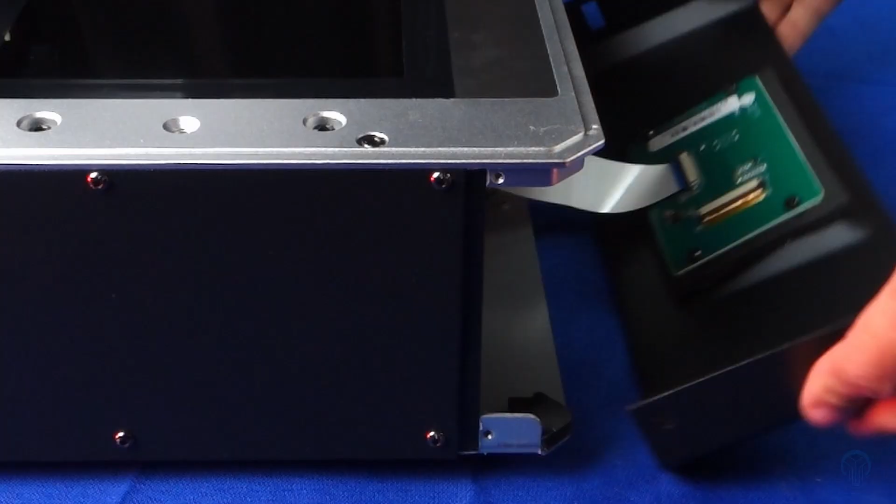Getting replacement parts, however, could prove difficult if Anycubic discontinues any of these in the future, and seeing how they've significantly reduced the price of the machine, it could mean that they're planning to do so within the next year.

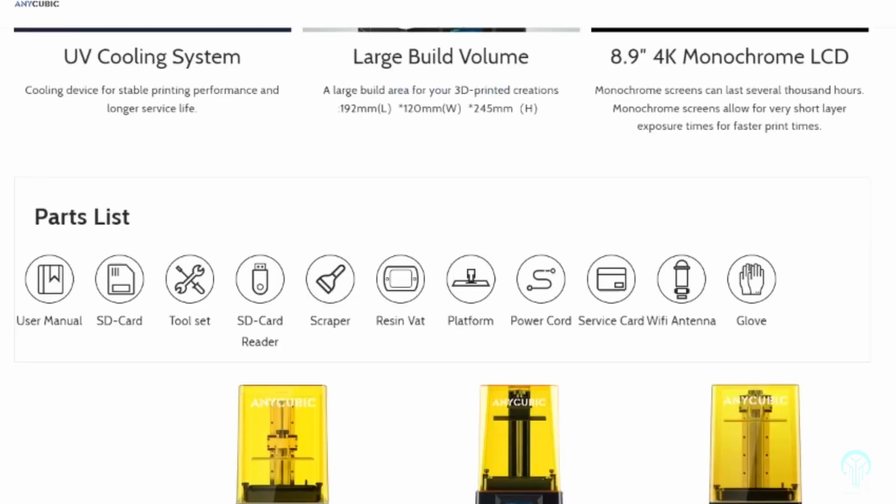If I'm being honest though, I've rarely needed to replace my screen, since 9 out of 10 times I've just had to reseat the screen instead. So for most people, this shouldn't be an issue. Also, in most cases, the price of the replacement screen will often make it more cost effective to simply purchase a more up-to-date machine.

When unboxing this machine, I always recommend checking for any particles or debris which may be on the FEP sheet or the LCD screen itself. Before any prints can be done, we first need to level the print bed, and for this we're going to use the sheet of paper that came with the machine.

You're going to loosen the bolts on the top of the bed and place the paper underneath. You'll then go to Tools, Move Z, and Home to home the print bed. You'll then apply even pressure on the build plate and retighten the screws. Your print bed is properly leveled when you can generally tug the paper out with even pressure on both sides.

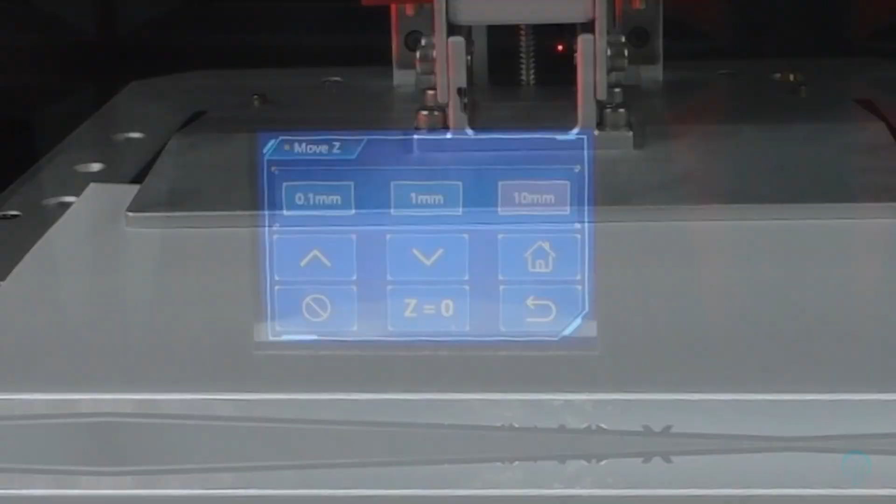As a side note, if your print isn't sticking, 90% of the time it's that the build plate isn't leveled correctly. You can find issues in the first couple of layers at two key points by listening to the suction sound that's made when the plate makes contact or lifts away.

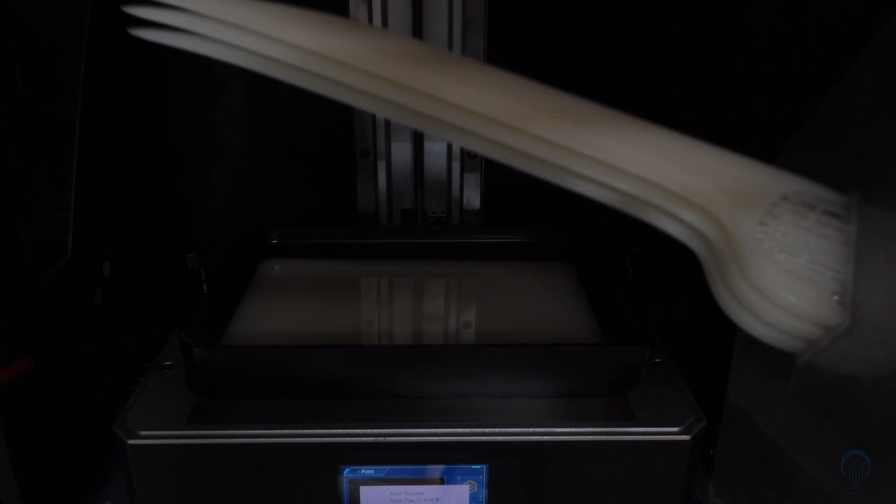I did open this machine to check to make sure that it had proper wire connections instead of tinned ones. In all the machines I've tested so far, only this one and its corresponding washing station had proper terminal connections. This is a great sign, and I hope to see this from other companies in the future.

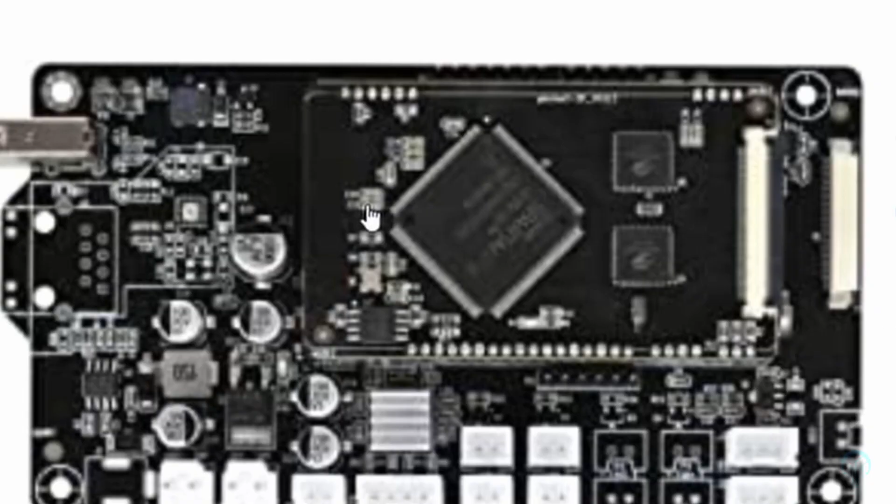One big issue that I have with this machine is the lack of a wiring diagram. Although the company does sell replacement motherboards, I simply couldn't locate any information on what each of the connections did for this machine. In today's age, this is potentially a big problem since it makes doing repairs or troubleshooting more difficult with the machine. I did create a reference page for the different boards, and that will be available on my website as a PDF guide.

Although this machine does come with Wi-Fi capabilities, I personally don't find these to be very secure, so I generally opt out of using them. In this case, if you want to have this capability, you can install the antenna that comes with the machine and sync it up with your other devices. From a production setting, this is generally the preferred workflow. However, I do still recommend having proper security protocols in place when doing so.

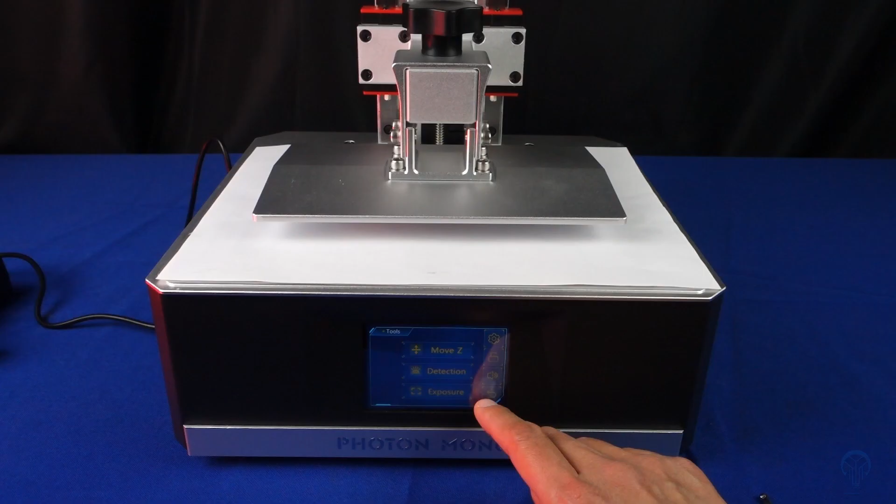The UV light that's used in this machine has some interesting properties to it. Unlike most machines, this one is designed with a built-in option so that the user can change its brightness level. When playing around with this setting, I discovered that I could tweak this depending on the level of detail I wanted. On my machine, I needed it to be set to 50% because it caused light to bleed into the surrounding pixels, which washed out some of the detail work.

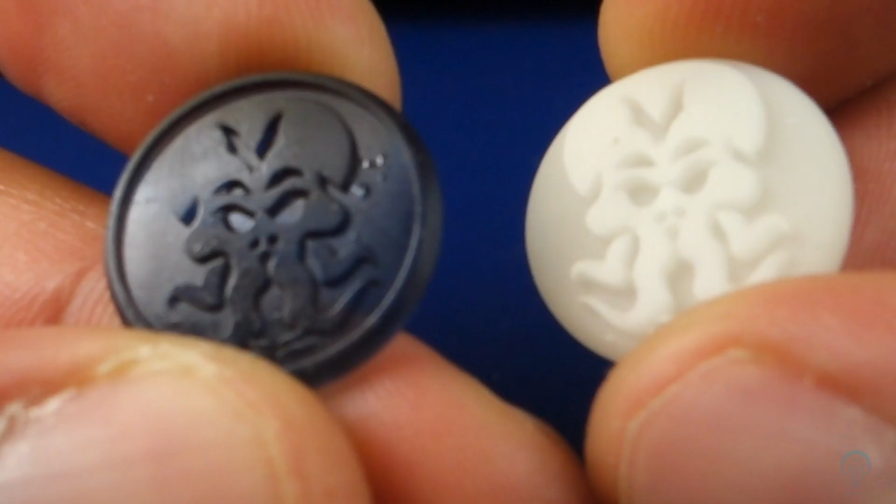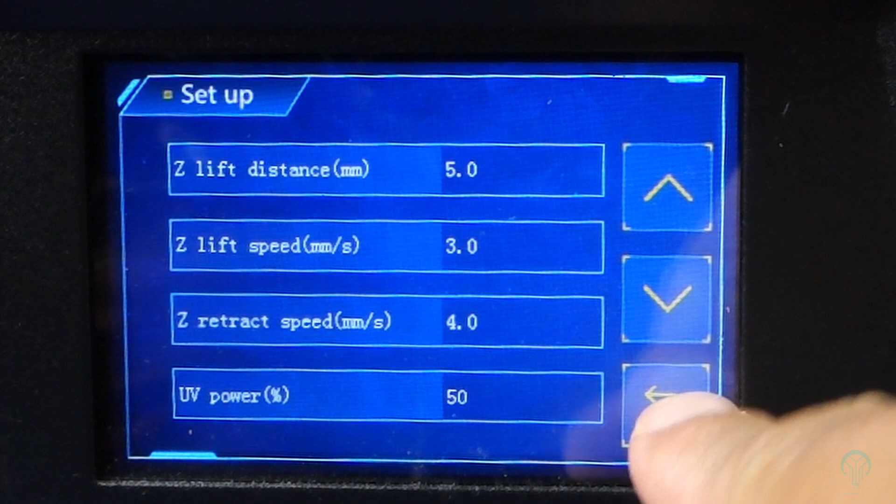Here's a quick comparison with my Elegoo Saturn so that you can see the difference. Although this can be a problem on smaller prints, it's great when doing larger scale production work where speed is a factor. Also important to note is that increasing the UV brightness could cause the light and the LCD to fail faster if it's set too high. So I would avoid doing this if you need accuracy or if you're trying to extend the life of your machine.

Now, I'm not quite sure how this got past quality control. However, the plastic that's being used for the knobs that tighten both the vat and the build plate are sensitive to isopropyl alcohol. Essentially, they become a liquid mess of melted tar-like substance when they come in contact with that product. Considering that isopropyl alcohol is normally used in the cleaning process, this can be a serious issue. Because the material I print with is predominantly white in color, it often leaves a black residue on the prints unless I scrub them down.

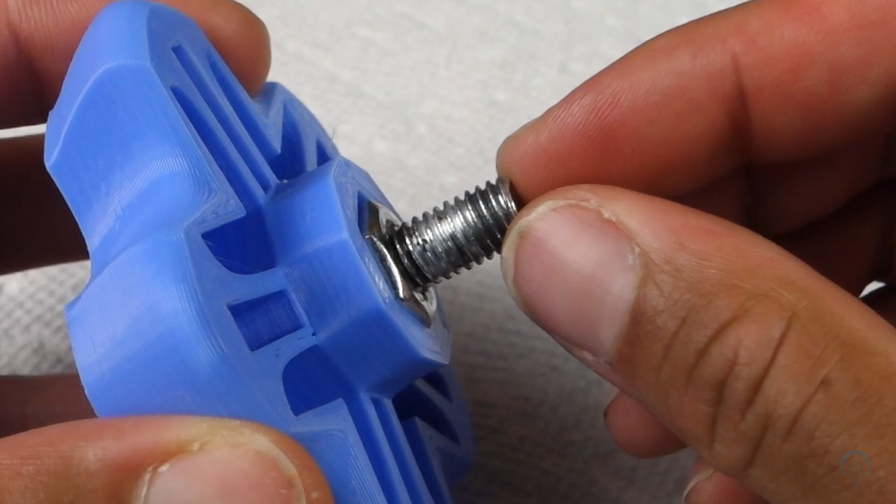Now, there's two methods for dealing with this issue. Prior to using your machine, you can spray a sealant over the plastic after having masked the threads out. Since mine had already been compromised, I designed some replacements and hacked off the original plastic. As always, I'll have the STLs available on my website along with the guide for this mod.

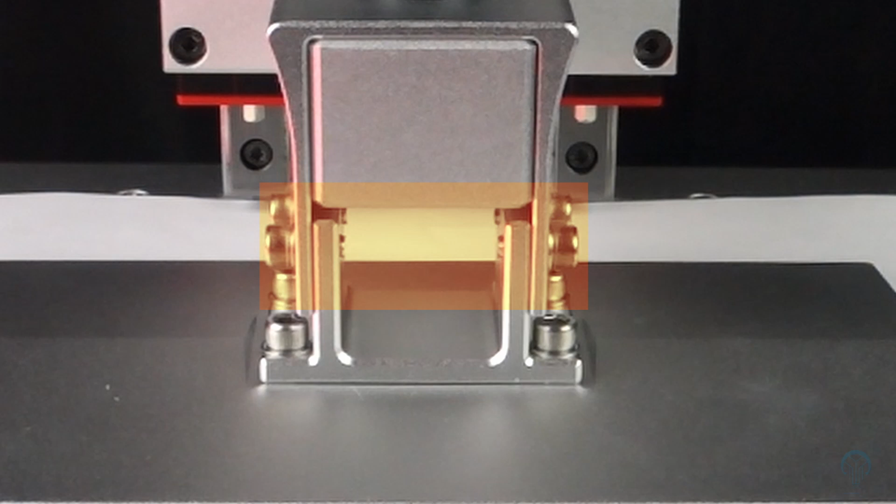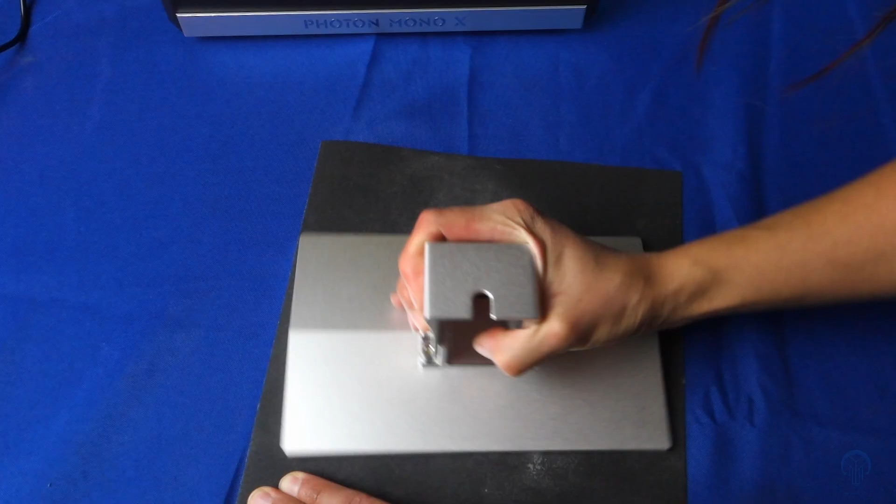The build plate is attached using 4 screws and is what I found to be more stable when dealing with these types of machines. The build plate on mine was flat, however, it isn't always the case, and it should be something that you check. If it isn't, you can sand it down with some 250 grit sandpaper, making sure to keep the build plate flat when you do so. To make things easier, you can tape down your sandpaper sheet with a strong adhesive to keep it from moving around.

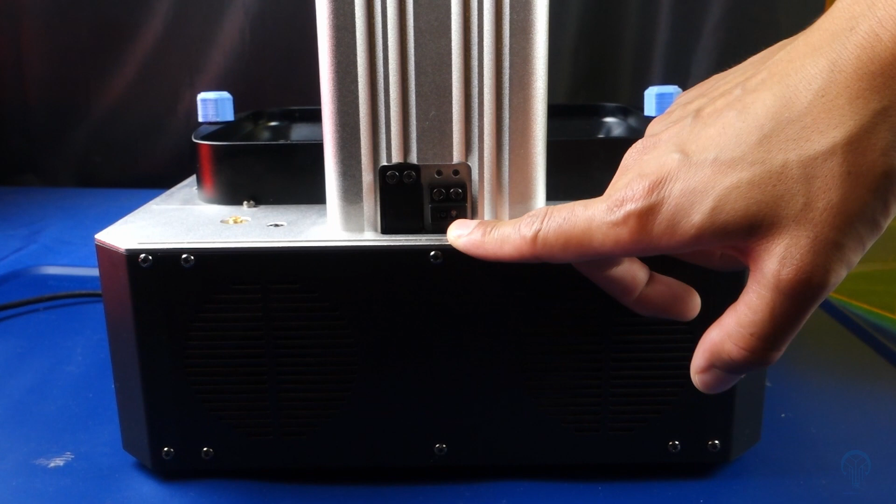To prevent the FEP sheet from getting damaged when it's sitting on a surface, they've added some small alignment feet on the bottom of the vat, and it is a welcome addition. I'm not fond of the lid design for this machine since it requires a much higher storage space in order to properly lift the cover off. I would prefer a two-part design where the front can come out and give you quick and easy access to the inside components. A great option would be a lid upgrade for this machine where you can replace it with something a little more functional.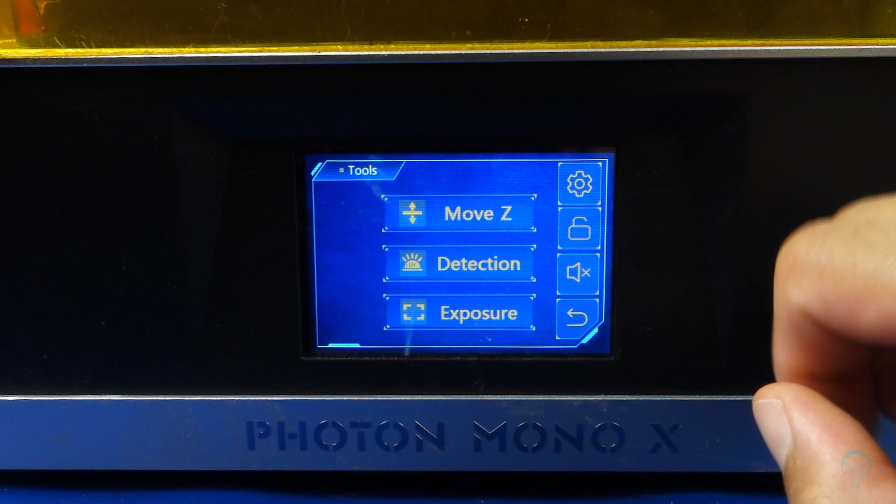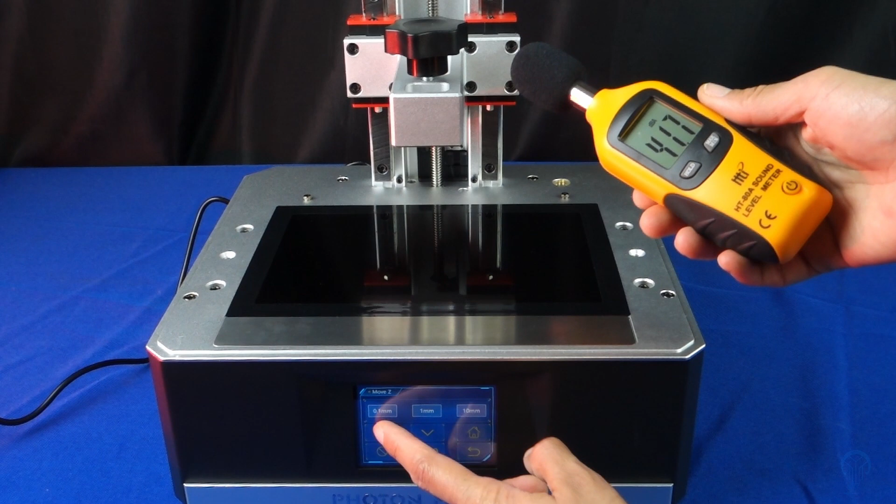A nice addition would also be to have carbon fiber filters integrated within the machine itself, since with the lid on, some of the fumes can escape. During my testing, I had far less layer shifts in comparison to my other machines, especially when doing larger prints. Although the linear rail system is very similar to that of the Saturn, it seems that they may have done a better job in alignment, since I can't seem to pinpoint the reason for this difference. So far, this machine has been my go-to for larger prints, while my Saturn has been delegated to the more detailed ones.

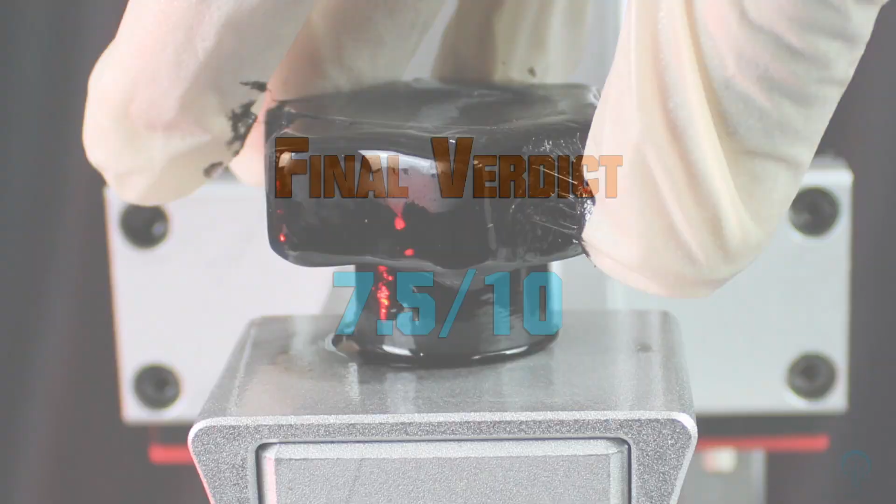So with all this in mind, what is my final verdict? Well, it's a great machine, but it has one flaw that's pretty big. Those handles are made from an incorrect material choice and should have been replaced with a new material. However, the company to this day ships with that defect. It's for this reason that it gets a 7.5 out of 10. The upgraded connections and improved print quality are what make this machine rated higher, since it introduces some well-needed improvements to the design. The innovation that we see with the UV light gives the user greater control over their print quality, and is something that other companies should look at for their machines as well.

I'm currently working on some additional mods for this machine, so you want to keep an eye out for those in the future.